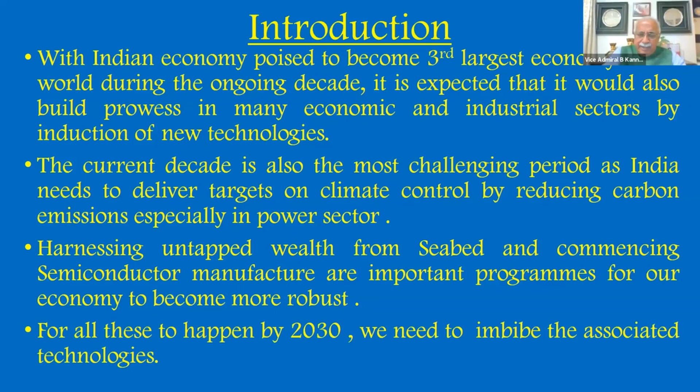For all this to happen by 2030 - targets for carbon emission as well as third largest economy - it is definitely important that we imbibe these technologies. So I've got 8 technologies listed today, and I will go through each one of them for 2 to 3 minutes each. I won't be able to go into great detail on each technology, so if you've got any questions, we can do it during Q&A period.

So I'll go to the first one, which is sea mining technology. It is not happening now. First thing, sea mining is not being done in India or in any country because the approval for doing this has not been given internationally. It is supposed to be given by UNO through a special organization called International Seabed Authority. It has not happened till now, but it is expected to come very, very soon.

However, in anticipation of this sanction coming sometime by end of '24, different countries have started doing their research and development, doing their preliminary trials, etc. India is one of the countries which has gone ahead and done the preliminary trials.

So this is India's map. Can you see this dotted line all around India? That is India's exclusive economic zone. So any mineral wealth lying within this dotted line belongs to India. India is also trying to get additional area in this hatched area on the western side as well as the eastern side. That case is pending with UNO.

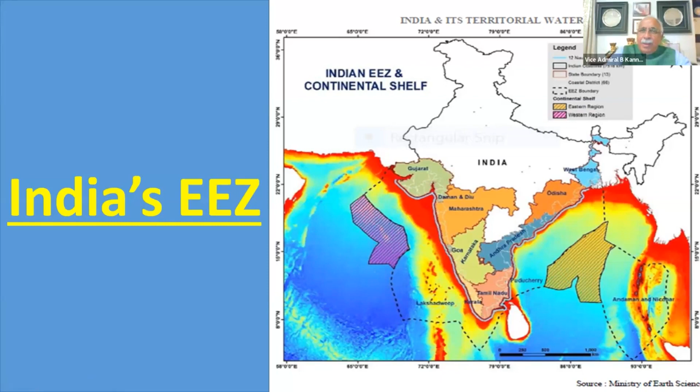And we have started almost taking out minerals from land in a big way. Now we are looking towards the sea. Now this is how it will happen.

India has already started doing it on a trial basis at 2 points in the Indian Ocean, which has been given to us only for trials, and we are going ahead with that work. There's an organization called NIOT in Chennai, National Institute of Ocean Technology, who's spearheading this activity, and they have gone ahead in the last 5-6 years and achieved a great amount of success in their trials, even at the depth of almost 5,000 meters.

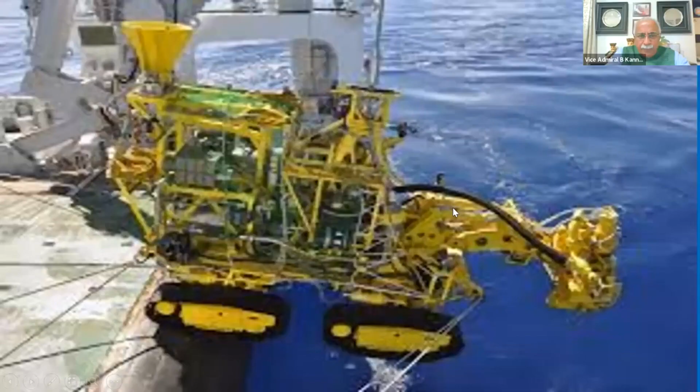That means from the ship to the seabed, it's 5 kilometers. This is the type of machine which they lower from a ship, which will walk on the seabed without getting stuck in the mud due to special arrangement of their propulsion, and they'll be able to do the survey, and the pictures will be seen on top before they are picked up by some other machine.

So a lot of wealth is lying there, and we have to consolidate this technology before we get the sanction from UNO, which will be a common sanction for all the countries having EEZ. So we should be ready to start in good measure by that time.

So now I will do the next technology. The next technology is semiconductor manufacturing technology, which you have definitely read in the paper about what is started. So I will just touch upon this.

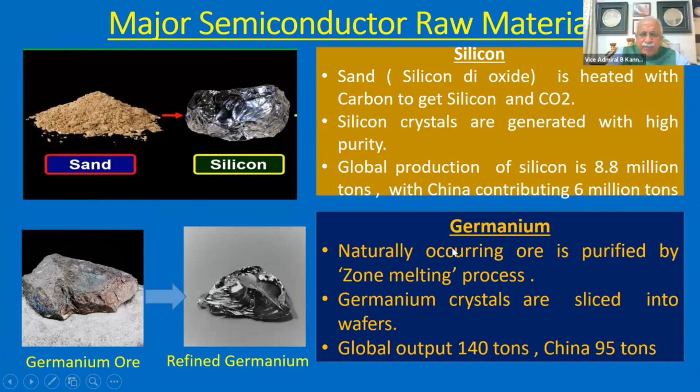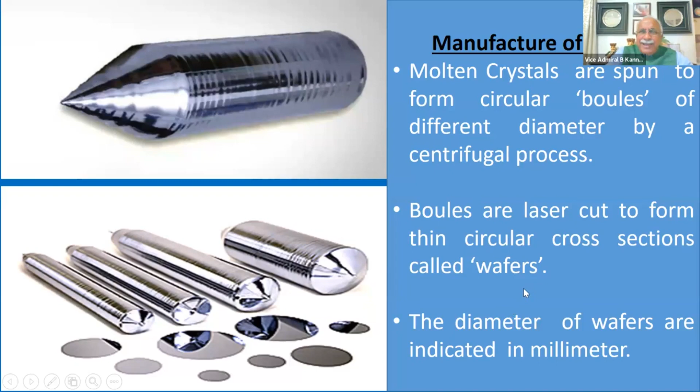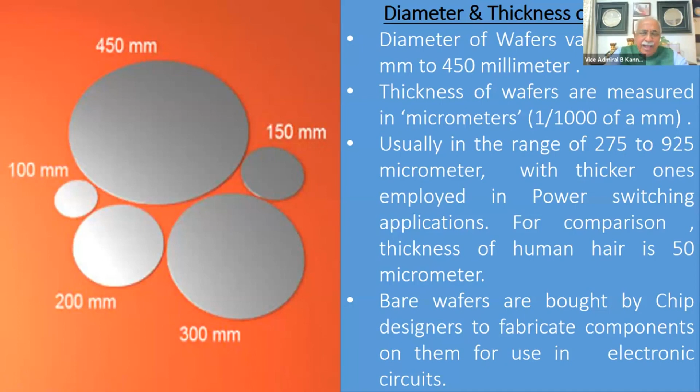The molten silicon is converted to shapes like this and then cut into small, thin wafers, which will be of different types of diameter. And this is one of the basic components used in semiconductor manufacture. And when you finish making wafer, you've crossed step 1.

Now, the semiconductor wafer, which is normally circular in shape, has some photolithography techniques done on it, and you will get small squares called dice. Each will have something like 10,000 to 20,000 transistors, which will help you make the hardware. So these squares are called dice, which are used for making a circuit.

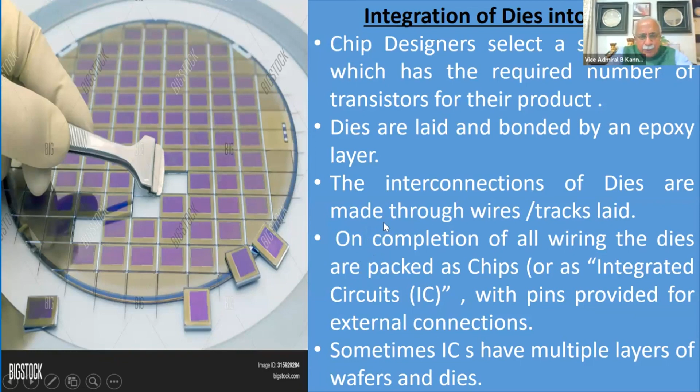And this is step 2. When you make a die, you've completed step 2. So step 1 is wafer, step 2 is dice.

Step 3 is making an IC, with all the dies interconnected as per logic, as per the circuit requirement, be it for a washing machine, or a car, or a satellite, or a missile system. You make the design as per the requirement of the function which is supposed to be done.

We are already doing design in India. Many companies are doing it. Tatas are doing it. There are other private companies also doing it, like HCL. Then Mahindra's also started doing it. So we are doing almost 1,000 designs every year today. There have been 1,000 different types of integrated circuits we are designing in India.

That is step 3. So once the design is completed as per the requirement of the customer — here the customer is, as I told you, maybe a car company or a washing machine company or some music system company — once you have designed the IC, then you take the dies as per the design, package it, wire it, and test it. That is step 4.

So let me spend 1 more minute on this slide. There are 4 stages. Step 1, wafer. Step 2, making dies. Step 3 is design, which is done in a laboratory, in a design center, mostly on a computer. And step 4 is assembling all these required dies, interconnecting them, encapsulating them, putting an epoxy cover, and testing it with the software loaded in it.

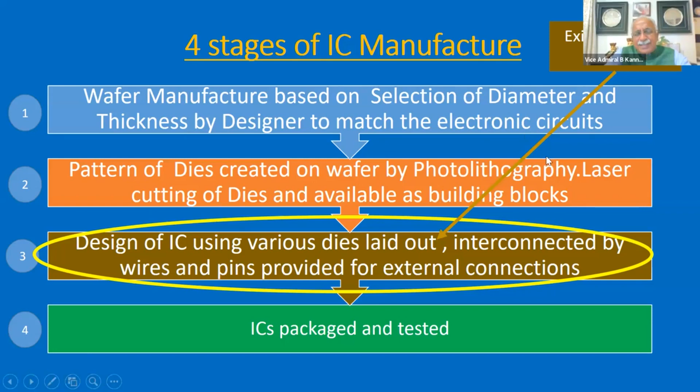Now I need to tell you why semiconductors are so important. They are definitely important because today everything is electronics. Electronics has to be compact, electronics has to be software-based, electronics has to be a digital system. So you have the requirement of ICs, which are semiconductors.

The value of semiconductors imported today is very close to the value of crude oil imported. Soon we will expect that chips will overtake crude oil, for 2 reasons. One, we require more chips. If you don't make in India, we'll have to buy, so we'll import more, that's number 1. Number 2, crude oil requirement is slowly coming down because renewable energy is coming up in a big way.

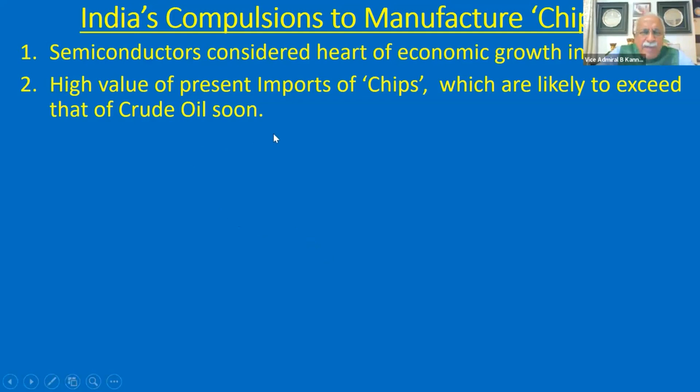So today we are almost importing $56 billion worth of chips. The idea is to make chips in the country, not all types of chips, some types - I'll talk about it later - and reduce our imports.

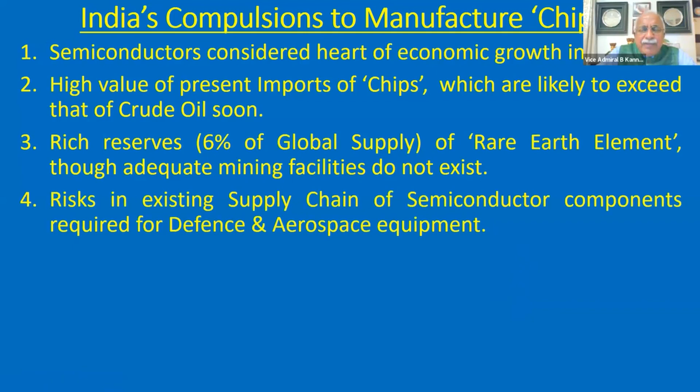We have enough reserves of rare earth elements, almost 6% of the world's supply. So we have enough silicon available, enough sand available for this. But converting sand to silicon for step 1, and later for step 2, requires a very mature ecosystem. So we will take some time to establish this facility in the country, which is immediately required for the extensive digitalization happening for 5G communication, defense, aerospace, etc.

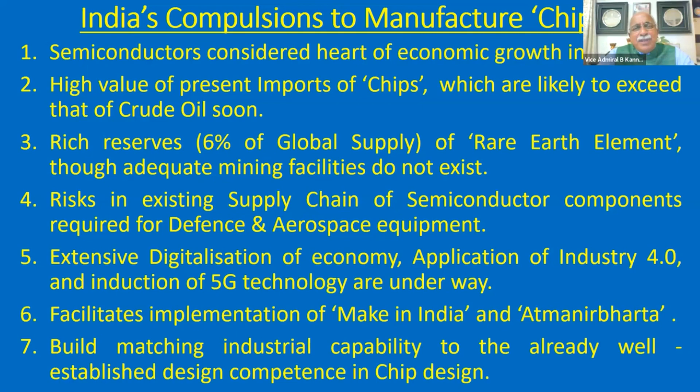Now, once we make step 1, 2, and 4, it will match with step 3, which we're already doing. So we'll have 1 plus 2 plus 3 plus 4, which will make sure that we are able to make - from sand, we are able to make a chip, right?

Government is giving a lot of support. Government has earmarked 76,000 crores as incentives. They fund the project cost almost up to 50%, and the feasibility is examined by a big committee.

So as far as the next technology, which was semiconductor manufacturing, it has already started in Gujarat and Assam. It has been inaugurated by the Prime Minister in the month of March, and we expect this to start immediately for step 4 by early 2025. As far as 1+2 in the Gujarat-based location, it will take 3 years' time. So that is my second technology which I have covered.

The third one is thorium-based nuclear power. Why are we talking about this? I will tell you.

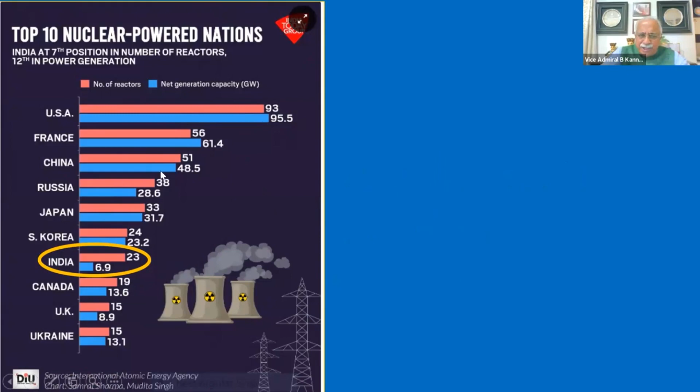Today India has 23 reactors in India. They produce nearly 7 gigawatts of power. The other countries which are having more reactors and producing more power per reactor are shown there: USA, France, China, Russia, etc. Our country has a fairly large number of reactors, but they are not producing a high amount of power.

And the growth in the nuclear power sector has been much lower than in other countries. France, USA, China are all in leading positions. The details are there on the slide. India is in the 7th position. All the reactors put together in India produce less than 2% of the power generated in India.

Maximum power is generated by thermal power plants, very close to 60 plus percent, then wind, then solar, then hydro, then comes nuclear. So there's a need - nuclear is clean and green energy - so there's a need for us to produce more nuclear energy, but we are not able to do it.

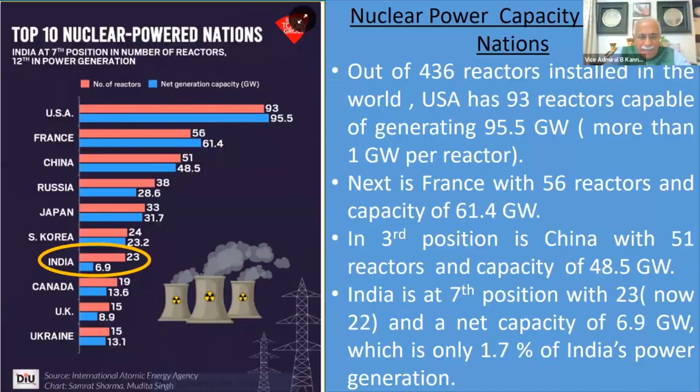I'll tell you why we are not able to do it, due to 3 reasons: 1, 2, and 3. First thing is, we don't have enough uranium. Uranium is the basic fuel for nuclear reactors. So for nuclear power reactors, uranium is available only in very limited quantity in India.

If you start using only Indian uranium, it will finish in the next 20 years. We can't do that, so we use a little bit from India and more imported from outside. And import is not easy because it's controlled by the Nuclear Suppliers Group, so there's a lot of international control on getting uranium. Or if you get uranium, you have to account for its utilization - you can't use it for enrichment for nuclear weapons. So there are a lot of checks and balances in this uranium supply.

India has lots of thorium available in big measure, but we are not able to use thorium for nuclear reactors because nobody is using it, since thorium is not fissile. Uranium is fissile, so you can have a fission reactor from uranium, but not from thorium. So we have a problem: we have thorium which cannot be directly used. How to do this is a question.

At the same time, you desperately want nuclear power, which is clean and green, so that thermal power plants can be slowly shut down, since they produce a lot of carbon emission. As I told you, more than 60% is from thermal power stations, and a lot of carbon emission is from thermal power plants. So if you want to control carbon emission, which is another target you are committed to, you have to enhance nuclear power.

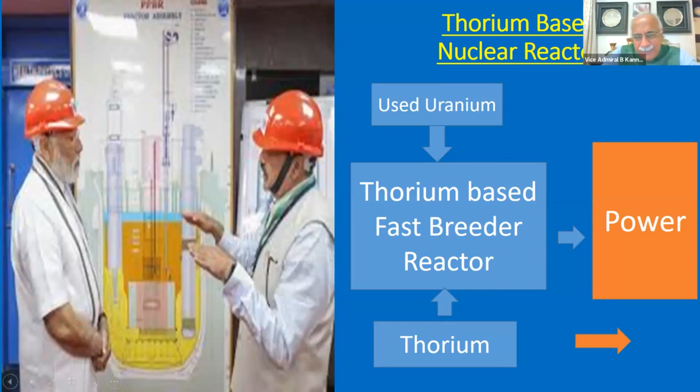Next, I will go to artificial intelligence. This is something which many of you know, but I will quickly go through it.

I'm talking of human intelligence now, not artificial intelligence. Human intelligence is when you have knowledge on the subject and you're able to speak, able to write, able to communicate. If you have both the ability to speak, understand and communicate, and at the same time have knowledge, then you have human intelligence. A person who does not have knowledge may be good at speaking, but he doesn't convey much. A person who has knowledge but cannot speak well also does not convey much.

So you should have both knowledge and ability to speak. When you combine these two, you will say he's an intelligent man, which is different from a knowledgeable man. So an intelligent man will have both these traits. When you combine the ability to communicate and knowledge in a computer, it is called artificial intelligence - the human intelligence is replaced by a computer with some software written on it.

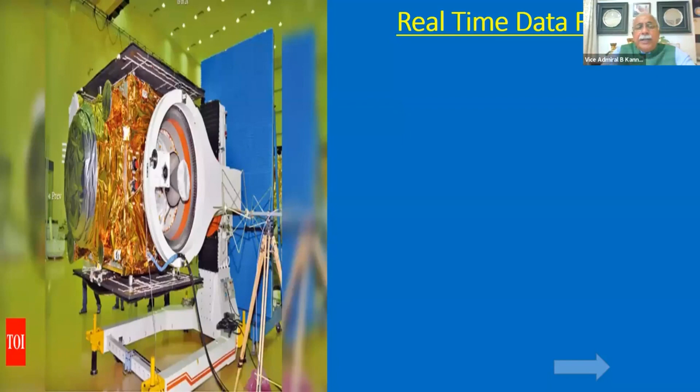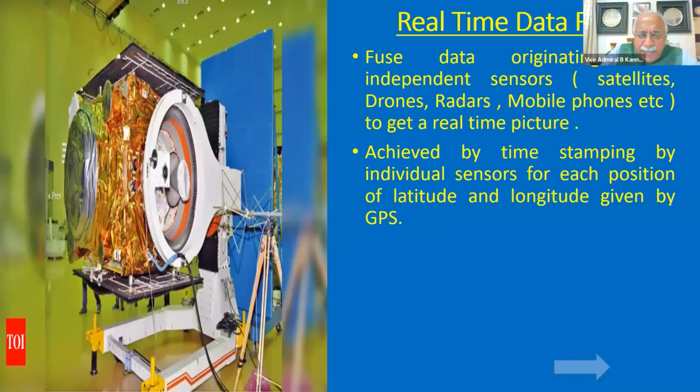So this is likely to happen in India maybe in the next 2-3 years. Attempts are being made by R&D agencies to generate this, and initially we will do it with GPS latitude and longitude, because NavIC has not started operating independently. After a few years, when NavIC comes in, GPS data will be removed and NavIC data will get fused. This is very important for security assessment and disaster management. As I mentioned, this is an important technology required not only for defense applications but also civilian applications, including disaster management.

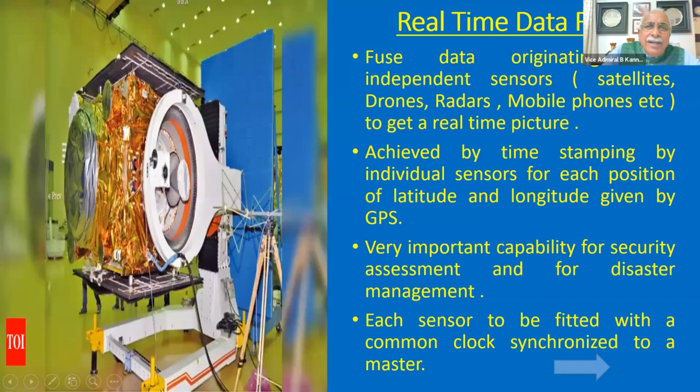Now I'll go to the next one, Gaganyaan. You may have read many things about Gaganyaan in the paper, in the media, but I'll quickly go through the important issues, only one or two. This is the module which is on top of the rocket. The rocket takes you from Sriharikota to orbit, but there's a service module at the lower level, and a crew module on top, inside which the Indian crew, India's first cosmonauts, will be sitting. This has got space for a maximum of 3 people. 3 people can go, but finally it may be only 2 people who go. So this is the crew module, and there's a service module, which will have...

...solar array, and additional liquid propellant engines for changing some requirement in orbit. Otherwise it will be operating at 400 kilometers above Earth. It is expected that this module will be there for a period less than 7 days, designed for a maximum of 7 days, so it could be 5 days or so. After 5 days, the plan would be to bring the Gaganyaan crew back to Earth. So the crew of 3 will be staying inside this crew module.

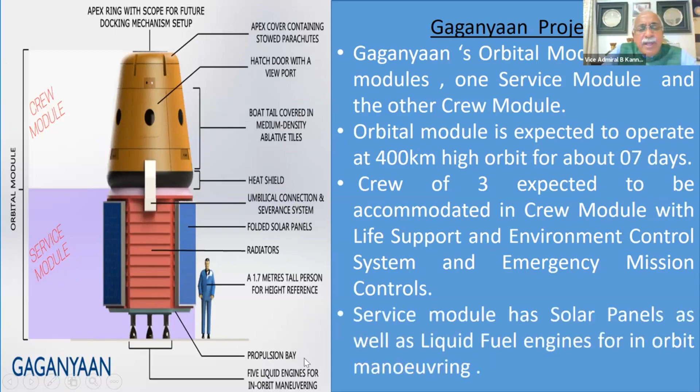An important aspect I will tell you: this crew module should have life support and environment control systems. I will spend a little time on that in the next slide, but that's a very important aspect, which is new technology as far as ISRO is concerned. And the service module, as I told you, will have solar panels and liquid propellant. So this is the crew module, which weighs about 5.3 tons.

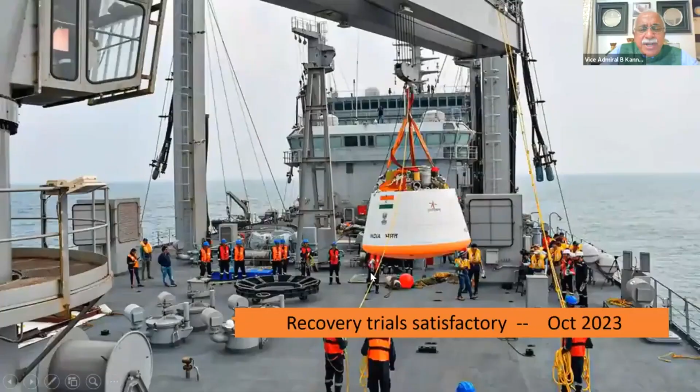On re-entering the atmosphere, parachutes will open and this will fall into the sea, just like other countries have done - USA, Russia, China, etc. It will be picked up by an Indian naval ship. This is the naval ship which did the trials in October. They were able to pick up this crew module. Of course there was no crew inside that, but they could recover it and the trials were satisfactory. Now, as we go back, we will launch from Sriharikota.

It'll go to the orbit. About 5 to 6, 7 days, it'll be in the orbit. And it'll come down, open parachute, and fall in the Bay of Bengal, where the ship will pick it up. So what will be the challenge? The challenge will be to make this crew module for the crew to stay.

That means the crew should be able to breathe oxygen, and they will, of course, exhale carbon dioxide. The carbon dioxide has to be removed. So you should have a system which will maintain the air inside the crew module just like the atmosphere: 21% oxygen, nitrogen, and some carbon dioxide. Whenever the crew exhales carbon dioxide, they should be able to remove it. That is where the challenge is.

The method by which this will happen during their period of stay will have to be made. This system will have to be made. The system in a big size has already been made for nuclear submarines in India, though of course the size is much bigger. It has to be made quite compact and put inside the crew module.

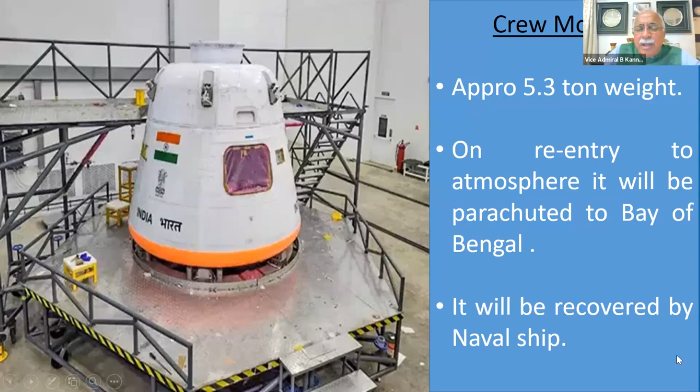This has already been tried out on our nuclear submarines, which are much, much bigger. So it will have to be tried out on a smaller area with smaller equipment, and various contingencies have to be planned in the trials. This will be recovered once it comes back to sea by the naval ship.

So I will go to the next technology, which is Samudrayaan, being done by NIOT, the same organization which was doing sea mining. I suddenly remember now this artificial intelligence discussion where the Prime Minister had a dialogue on TV with Bill Gates. It had come on the TV.

Okay, Samudrayaan, we'll see very clearly what is the scope. It's a sphere, a titanium sphere, about 2.1 meter diameter. The shell is 25 millimeters thick because it has to go to 6000 meters below the sea with 3 people inside. This is a manned underwater mission.

Why are we doing this? Because once we start sea mining, our machines which are working may have some malfunction, and we have to go see what exactly has happened. Is it broken? What type of damage has happened? So you have to send people to the bottom of the sea who will look through these windows, called portholes. Through these portholes, they'll be able to examine and take photographs of our equipment which has started malfunctioning at the bottom of the sea. They'll be able to go down, attend to it, and come back.

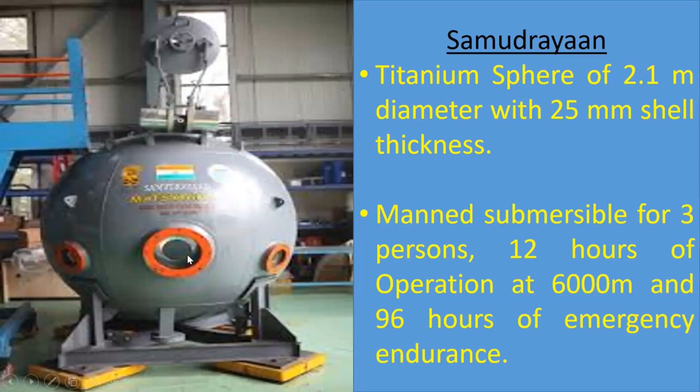They have only 12 hours to do this. So within 12 hours, they'll be able to complete this and come back. It is lowered into the water, into the deep waters. The trials were conducted on November 21st, tried up to 500 meters, and were successful.

Now they'll be tried for higher depths. We'll go to 1,000, 2,000, 3,000 meters like that. We'll try up to 6,000. This is a very important capability which we have to have when we start our sea mining operations.

Very often we'll also have to see whether any other equipment of some other country is operating in a particular area in our EEZ. So if you want to do some reconnaissance of that, you also require these sort of spheres, which will be lowered from the ship, from the surface.

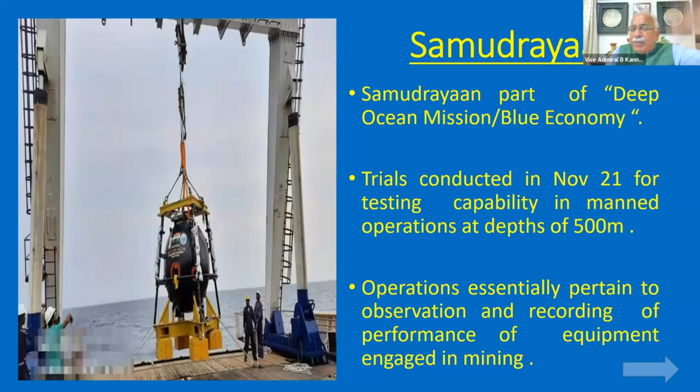Now I come to my last technology. As I told you, removing carbon dioxide from the atmosphere is a huge challenge for the whole world. You're already feeling the effect of global warming.

I'm sure every place in India, every place in the world is warmer than what it was last year. So we have to find ways and means of removing carbon dioxide from the atmosphere. Higher levels of carbon dioxide trap heat in the atmosphere, making it warmer, which leads to melting of ice in the polar regions and sea levels going up. A whole chain of actions takes place. So let us see how this removal can take place.

There are five techniques. One is afforestation. It takes a long time, you have to plant a tree and it has to grow and absorb carbon, but it's a good technique, a natural way of doing it.

Another one is you burn dead wood into charcoal under controlled conditions with less oxygen. If you burn it with normal oxygen levels, carbon dioxide is produced, so by burning charcoal with less oxygen you reduce carbon dioxide release. This is called biochar or bio waste, and it can be used as fertilizer while carbon dioxide is not released much.

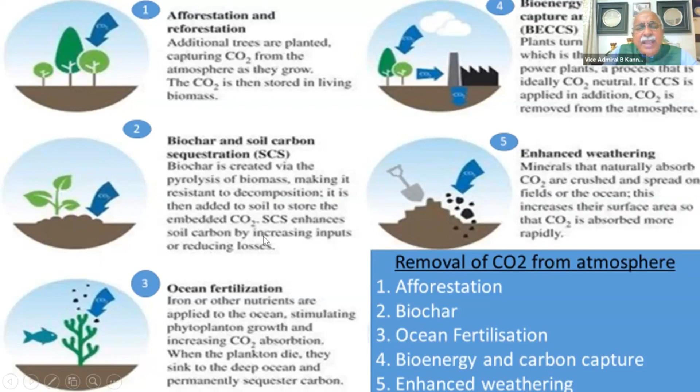So there are many techniques which have to be tried, but the most important technique which the world is trying to pursue, very briefly, is capture of carbon dioxide.

First of all, you should know the difference between capture, avoid, and remove. Avoiding carbon dioxide means don't burn diesel, don't burn petrol, don't burn coal - that's one way of reducing it. The other way is you remove carbon dioxide while it is being burned through some chemical process. There are many ways this can be done.

It has been tried out on board ships, where the fumes are passed through an alkaline solution in a tank, going through a chemical process by which carbon is removed. But that's not possible in big factories etc., as it requires huge infrastructure. So you go to capture.

In capture, you take air from the atmosphere and there's a filter inside which absorbs the carbon molecules. It's a molecular filter - it holds back the carbon molecule and only the air goes past. When this filter is choked, you remove it and put another filter, or automate this process, like I talked to you about with nuclear submarines. This principle already exists for specific applications, but not so much for doing it in the open atmosphere.

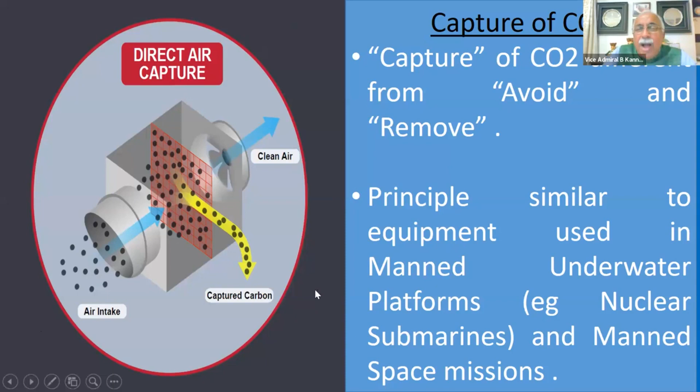So let me come to the conclusion of today's talk. We are going to become the third largest economy. Lot of industrial advancement is required, lot of power has to be generated, and that means a lot of coal will have to be burned if nuclear doesn't cover all the power needs. So we have to make sure our manufacturing in semiconductors as well as security of mineral levels, that is sea mining etc., are able to consolidate in the next 5-6 years. Carbon emission has to be controlled simultaneously while we are doing all this.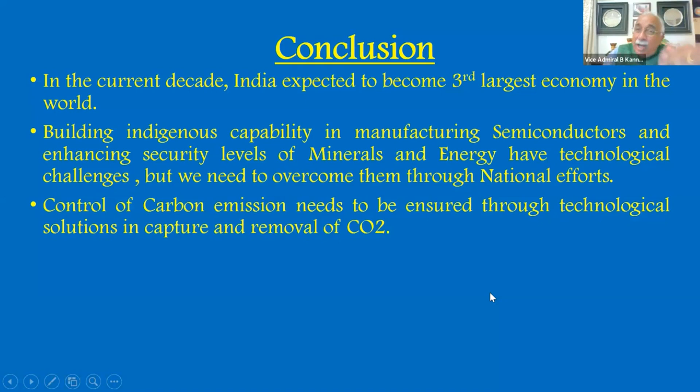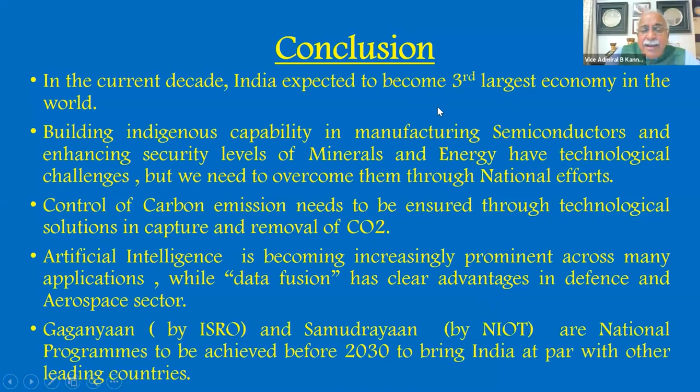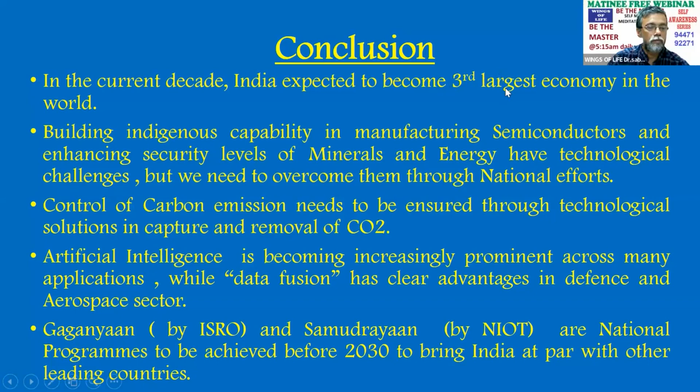Artificial intelligence should help us, while data fusion will give us tactical advantages in defense and aerospace, apart from enabling efficiency in disaster management. Gaganyaan and Samudrayaan are national programs which would ensure we are able to join the big League of Nations, the powers which have been able to do all this work, and we would be at par with other leading countries when we reach third economic power status. Ladies and gentlemen, thank you very much.